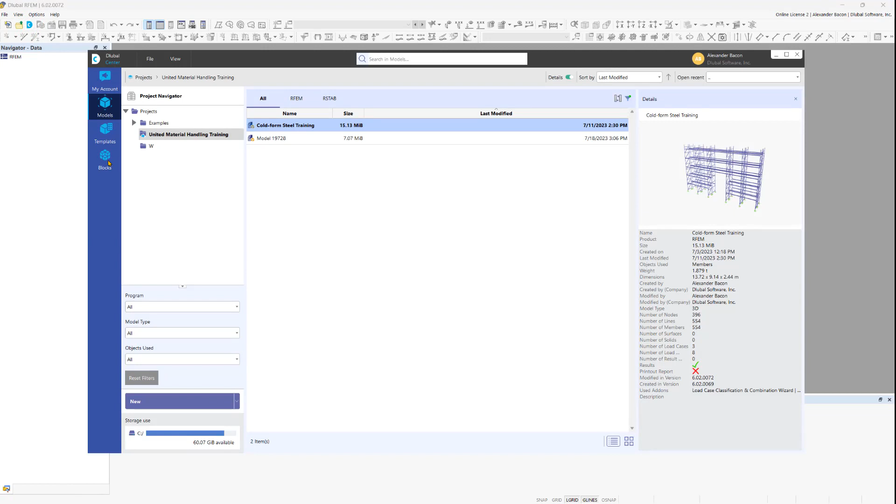In this video, we will become familiar with the user interface and control of RFEM 6. To illustrate the features, we will use a steel hall as an example, which we will model together during this tutorial. If you do not have the finished model at hand, you can alternatively download one of the many RFEM models from our new Dlubal center and use it to explore the user interface.

Now let us load the desired structural model into the software so we can start.

The RFEM user interface is divided into several smaller areas, each fulfilling specific functions that are automatically linked to each other to ensure an effective workflow. For example, modeling can be performed using the menu bar, the navigator, or the tables.

At the top, you can see the menu bar. Use the menu bar to access all RFEM functions. It is structured in logical blocks that you can easily access by clicking. The menu opens and you can find model-specific and software-specific settings, commands, and functions.

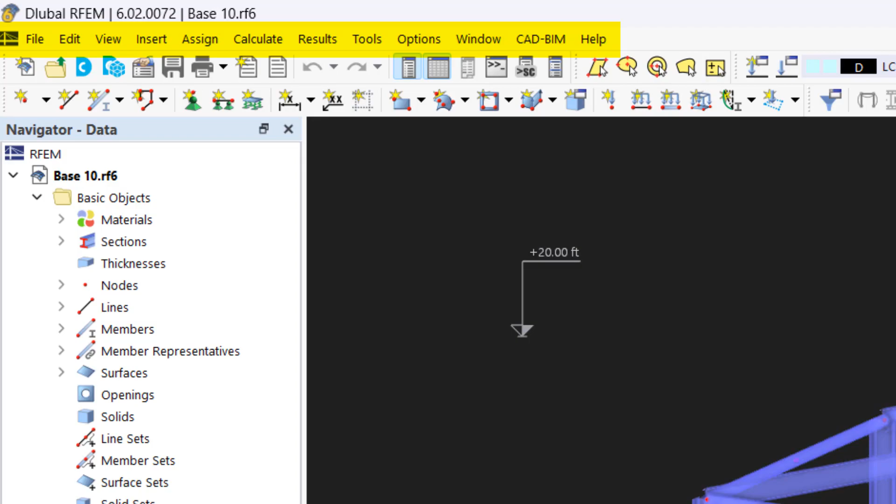Just below the menu bar, you'll see the toolbar. The toolbar provides a selection of buttons and lists for direct access to the most important functions in RFEM. When you move the mouse pointer over a button, brief information about the function of this button appears. Some buttons include subcategories and lists with topic-related functions.

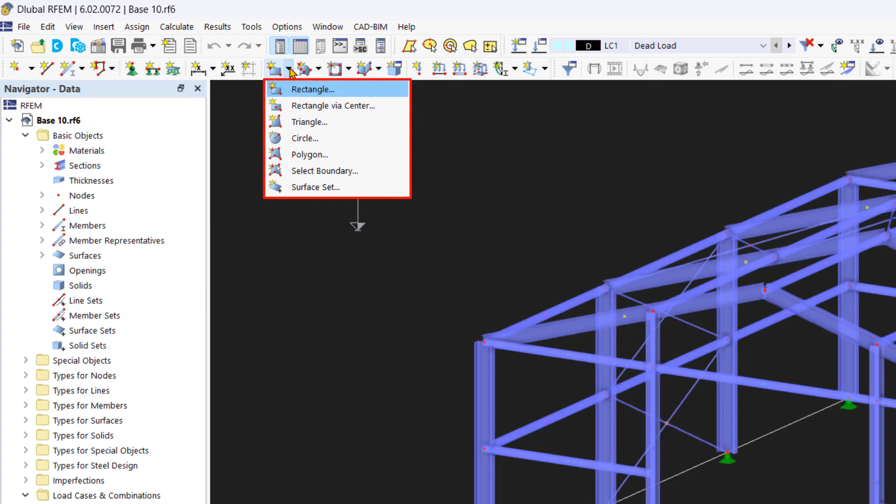To access these functions, click the small arrow next to the button. The last selected command is placed at the top of the list.

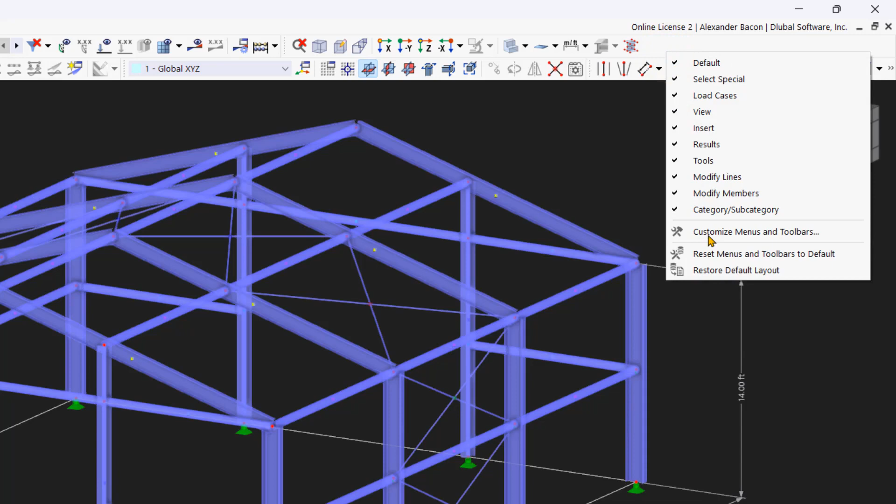Of course, you also have the option to customize the toolbar or even create and save your own toolbar. To do this, right-click anywhere on the toolbar and click Customize Menus and Toolbars. In the window, you can move the desired command into the desired position using the drag and drop function.

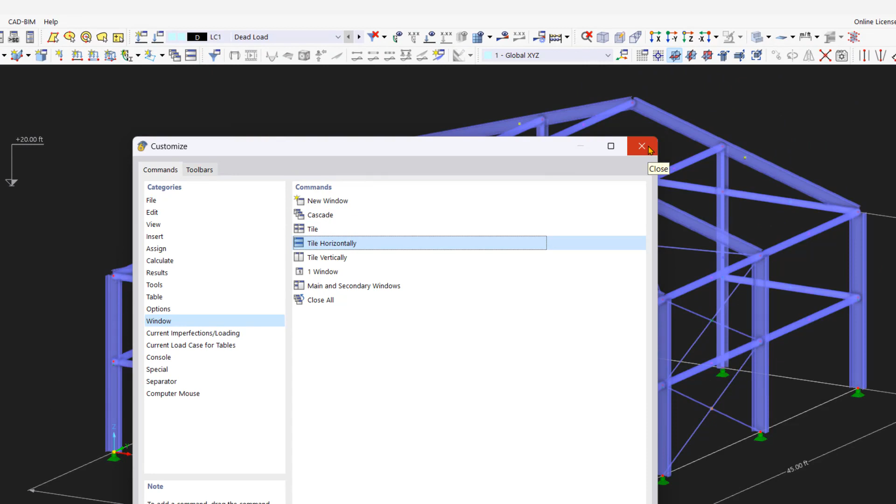For this tutorial, we will stick with simply the default layout of the toolbar, which you can set by right-clicking on the toolbar, by clicking Reset Menus and Toolbars to default.

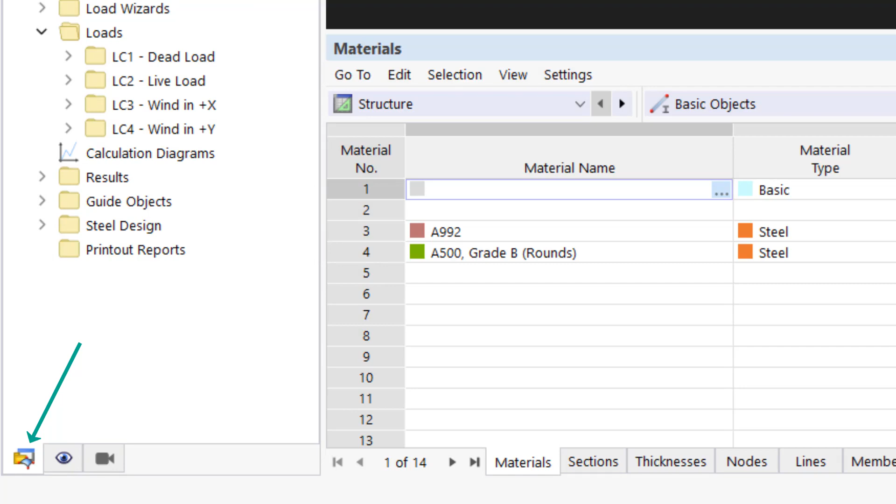The navigator, located on the left, manages the file data in a tree structure. The first tab is the Data Navigator, which manages the model and design data, as well as the load cases and design situations. It provides a structured overview of the model, including new categories like surface thicknesses, sets of members, sets of surfaces, and much more.

The subcategories of the model data are also new. The main categories represent the basic objects such as materials, nodes, lines, and surfaces, while the subcategories manage specific properties of an object, such as the type of hinges that can be assigned to a line or member.

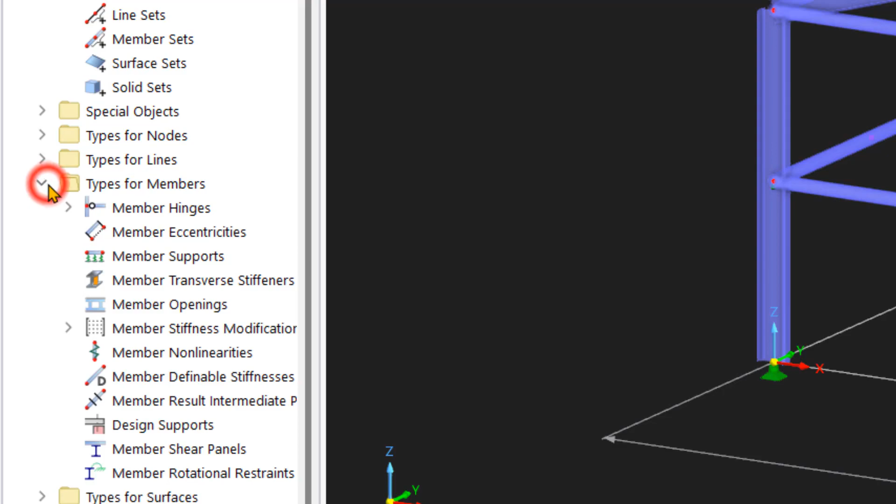Quick tip, if you select an element in the navigator, it will also be selected in the model. For example, you can right-click on the element, choose Find, and a red arrow shows where it is located in the model.

The Display Navigator controls the graphical display in the workspace. Use the checkboxes to switch objects and attributes in the graphic on or off.

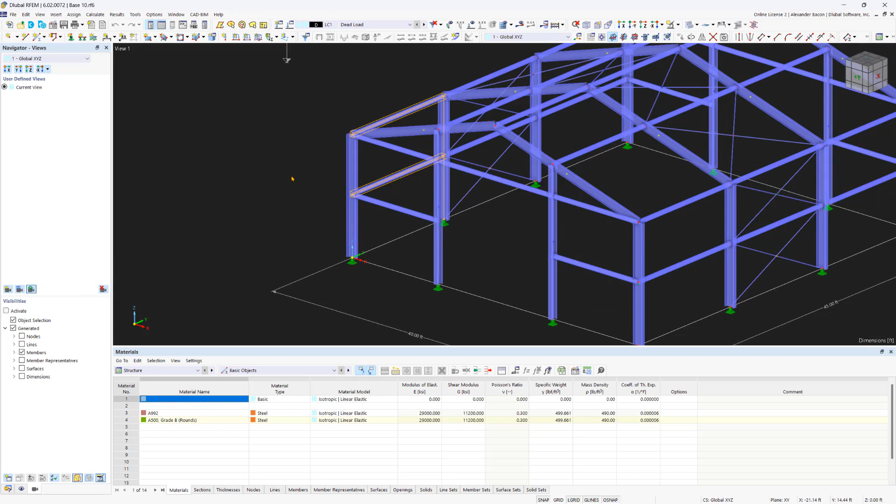The Views Navigator manages both user-defined views and various visibility settings. In the upper part of the Views Navigator, you can create, edit, or delete user-defined views. All these functions allow for an efficient and convenient workflow. We will learn more about working with views and visibilities in later videos.

After calculation, a fourth tab appears in the navigator called the Results Navigator. In the upper part, you can display the desired results, and in the lower part, you can define their display type. We will explore more functions as well as tips and tricks of the navigator during the tutorial series.

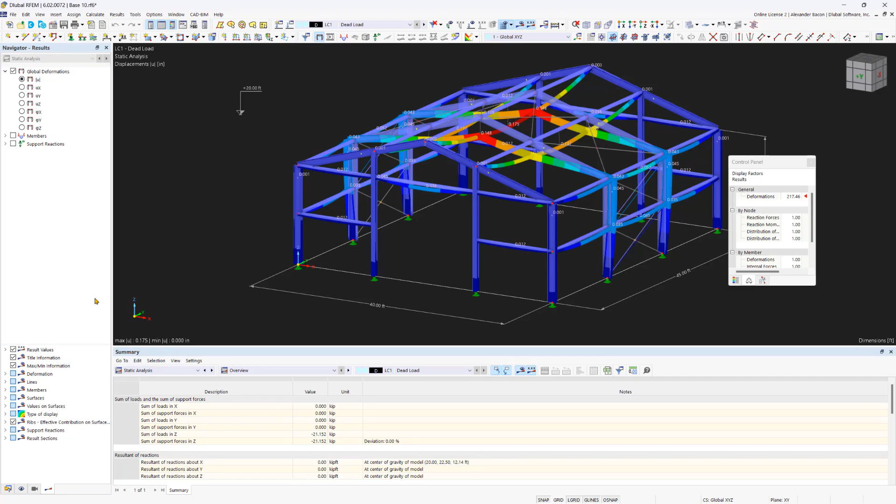In the lower part of the RFEM interface, you will find the tables. The tables manage all model and load data numerically. They represent the internal data structure of RFEM, allowing you to create and edit model data, load cases, results, and much more without having to work graphically.

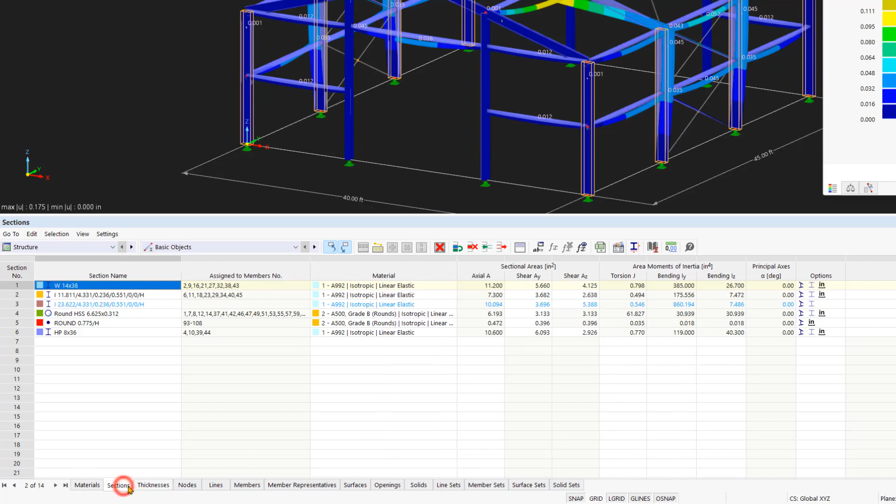The menu bar in the tables is new to RFEM 6. It provides a much better table structure and allows for better functionality compared to previous RFEM versions. Now let's take a look at the controls in RFEM 6.

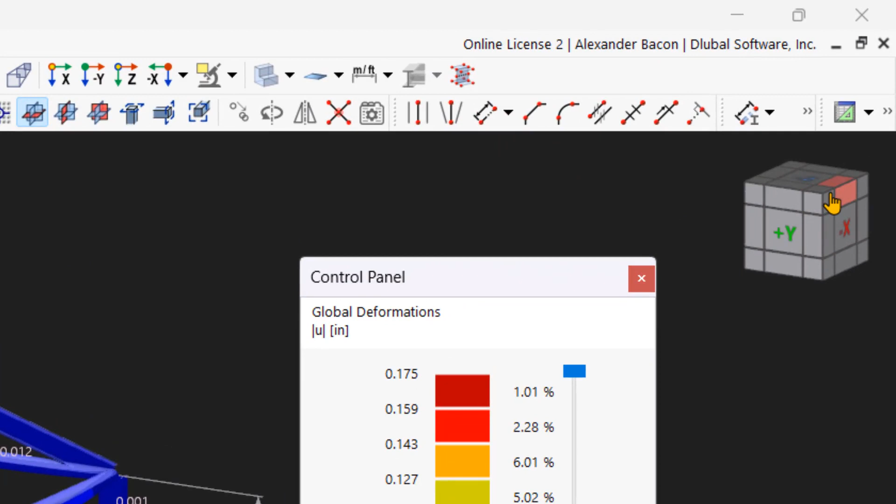The view cube is also new in RFEM 6. You can click or rotate the cube to control the view. Alternatively, you can control it using the mouse and keyboard as well.

To select an object, click it or draw a window over the object. Afterwards, you can drag or copy the selected object anywhere by holding down the Control key on the keyboard while moving the cursor.

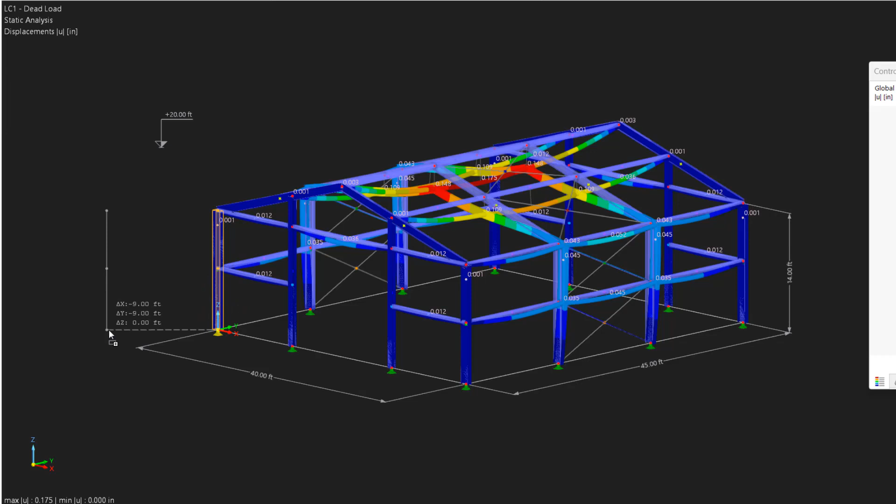If the window is drawn from left to right, only the objects completely within the window will be selected. However, if you draw the window from right to left, the selection also includes objects that intersect the window, such as beams and surfaces.

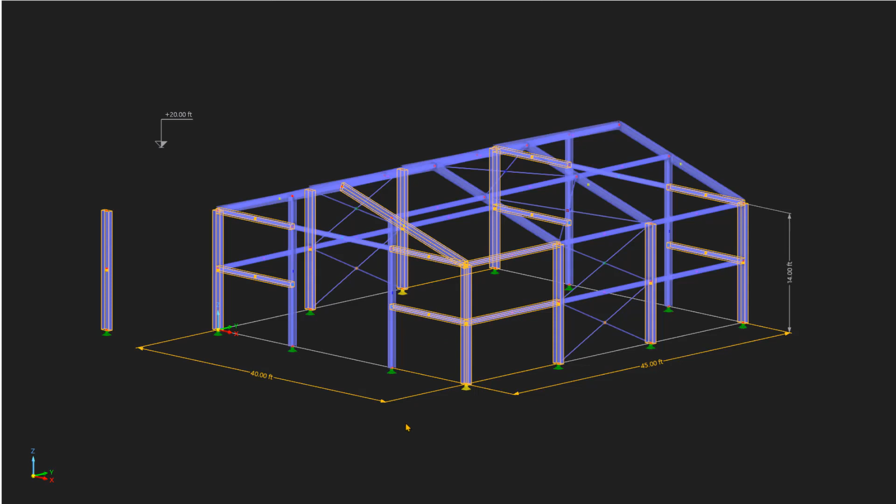To modify an object, double-click it, and the Edit Model dialog box will open, where you can adjust the object parameters.

By pressing the scroll wheel in, you can move the model back and forth. Holding down the Control key and pressing the scroll wheel in at the same time allows you to rotate the model.

This is very similar to the cube. Rotating is also possible by moving the cursor while pressing the scroll wheel and right mouse button simultaneously.

With the Shift key pressed and the scroll wheel pressed at the same time, you can zoom in and out. Zooming is also possible intuitively with the scroll wheel or by dragging a window over the desired area using the right mouse button.

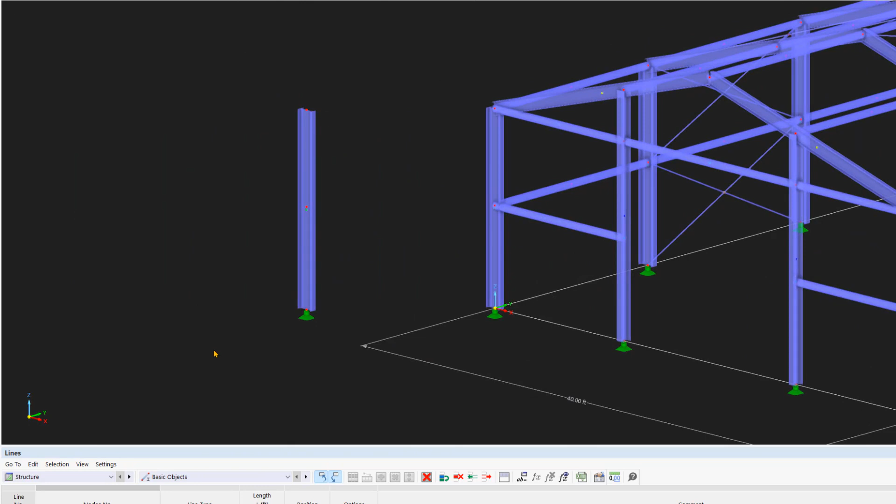To display the entire model, double-click the scroll wheel.

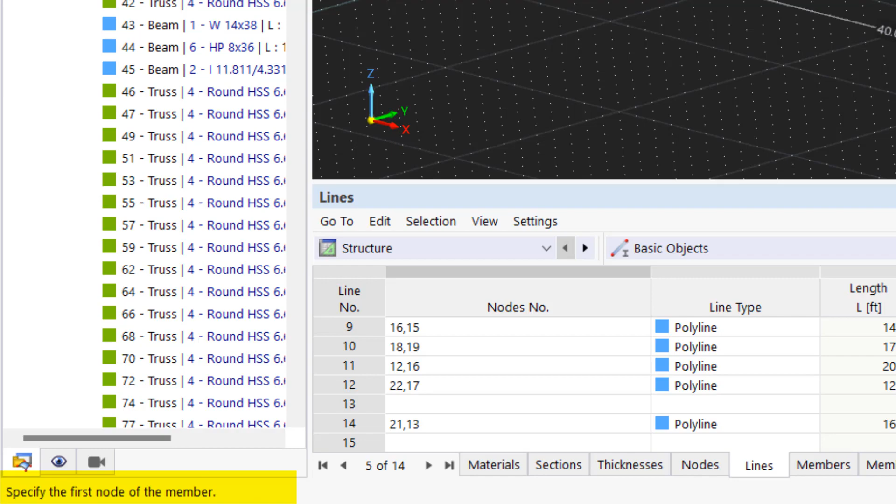The command bar is located at the bottom part of the RFEM user interface. When executing a command in RFEM, a window will open on the left-hand side of the screen, asking you to perform the next step in the command. In the middle of the command bar, you will find a few shortcuts that help with working graphically.

After this extensive overview of the RFEM interface, we will start modeling the steel hall in the next chapter and discover more new features. Thank you for watching, and until next time.